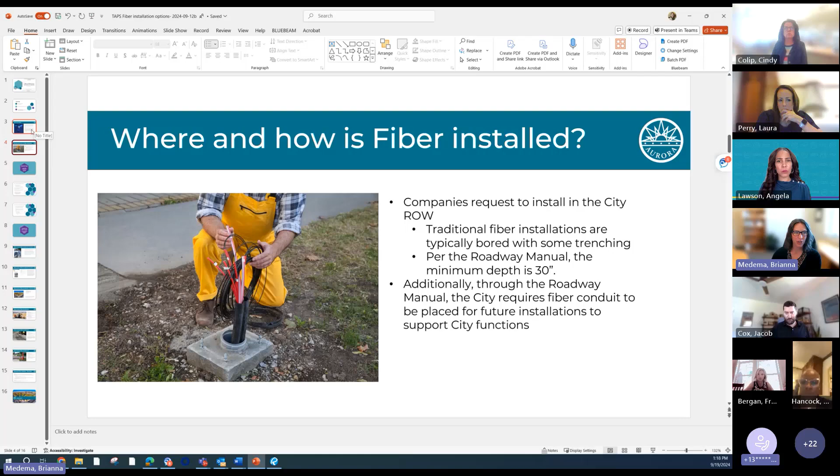Okay, great. All right, so the next one is the permitting, and we're walking through what the city has done in the last couple of years and the current process. So fiber is permitted through a master license agreement, which is one master license with a specific company. Then there are individual plan sets, which are individual engineering submittals. And then there is a public improvement permit, which is the permit to do the work in the right of way. So there's a couple different steps on that.

Fiber applications are required to adhere to the city's code and criteria. One thing to note is that all fiber companies must be treated fairly and equally, so what we do for one company must be allowed for all companies.

Last year, the city processed 131 fiber folders, which are individual engineering documents for fiber installation. This year to date, we've processed 121, split into two groups because we've had a significant process upgrade this year with a fiber portal. Before the upgrade we had 86, and we've processed 35 within the new portal.

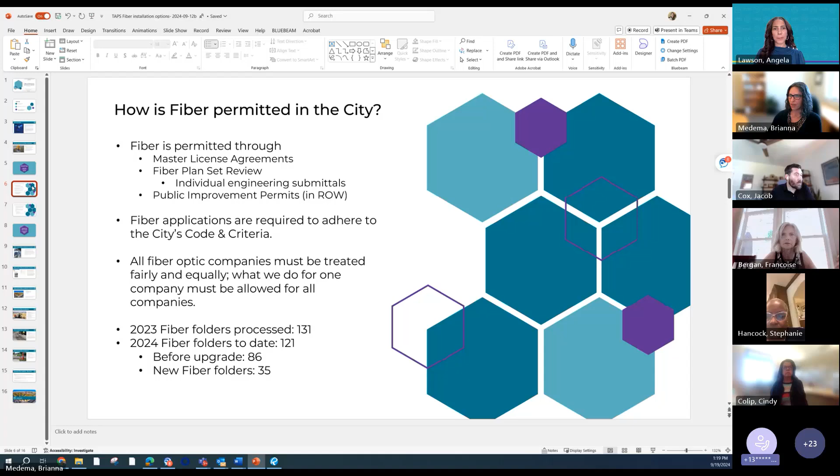So the city has fiber standard operating procedures. These were first created and implemented in 2022, which included significant industry outreach to make sure we had a document that would help new providers come to the city and get through our process easier. It's a document that summarizes both the process and the relevant criteria. This fiber SOP was updated both in 2023 and this year, based on cities' and applicants' feedback, and updating Aurora water standards and criteria.

Previously, there were things that were emailed back and forth. Now we have a little bit more accountability since we're in that portal, more traceability. With that new portal, we have an improved process, and we're using and leveraging some of the technology we have to make these reviews more efficient and faster.

So those are the things that we have done for the permitting and the improvements. One of the bigger things we've had in the last couple of years is a request and an evaluation of new installation technologies.

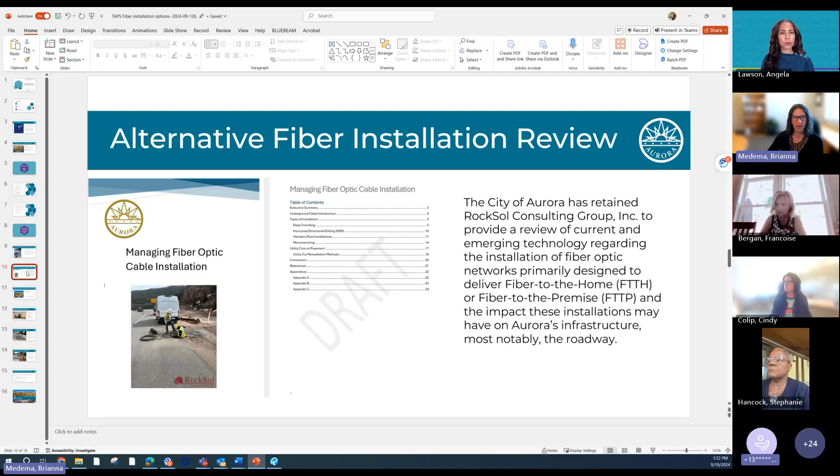The new technologies are within the roadway and how that could impact it. The different options that were looked at and evaluated were trenching, directional bore or horizontal directional drill (HDD), plow or vibratory plow, micro trench, and then missile bores.

One thing to note here is the city needs to treat all the different fiber companies equally. So if there's proprietary things, it makes it really difficult to have equal rules for all.

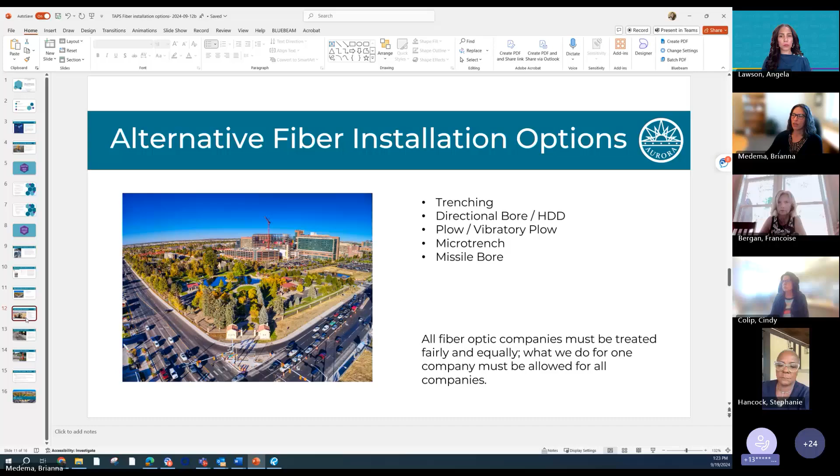Moving on to trenching, this is adopted by the city. This is essentially to dig a trench, expose the whole area, then put it in the bottom of the trench and cover it up. It's used in challenging locations where there's a lot of utility conflicts, and the depth for installation is 30 inches. So you dig that trench of a minimum of 30 inches for installation.

Directional bore or horizontal directional drill is adopted by the city. This is primarily how fiber is installed currently within the city, and the city's minimum is that 30-inch depth.

One of the things we're looking at is under consideration for the vibratory plow technology is where this would be appropriate. This is definitely not an area we would want, or not an installation technology we would want, adjacent to mature trees or infrastructure that's in place.

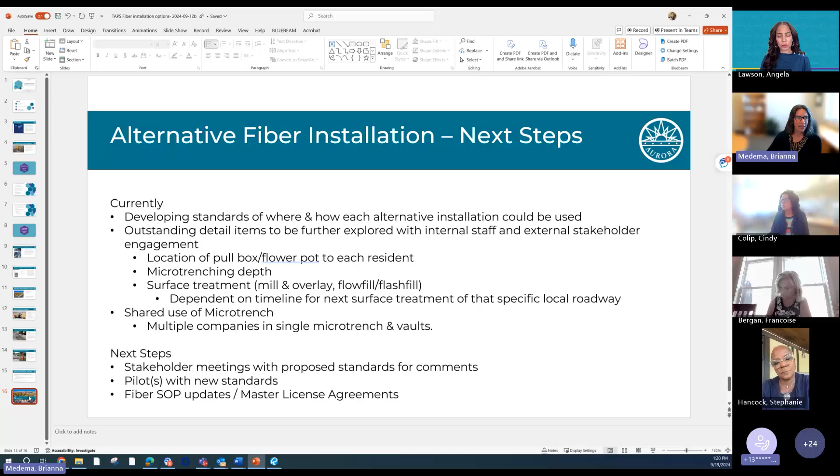Vice Chair Bergan. Oh, thank you. I don't have audio, so I'm on my phone. I didn't know if you knew that.

I have a question on the missile bore. You said it was paired with microtrenching and that it would, I think, avoid the curb and gutter. Can you explain that again? Because I didn't quite understand how that works.

Absolutely. There's a couple different terminology or different terms that are used for this. But this would essentially be a shallow bore that would go from the roadway underneath the curb and gutter and underneath the sidewalk, and then it would stay roughly at the same depth as that microtrench. Unfortunately, these missile bores don't have high accuracy of left and right and up and down, so there's some challenges for that. So that's what we have.

Okay, so just in terms of all these alternatives, which one is less invasive on residents' yards? Because I'm sure other members on this committee have probably had constituents reach out about their yards being ripped up, and equipment being put in wrong places and having to then wait months to get it back to what it was supposed to look like. I actually had a constituent that I think ended up almost in litigation over it.

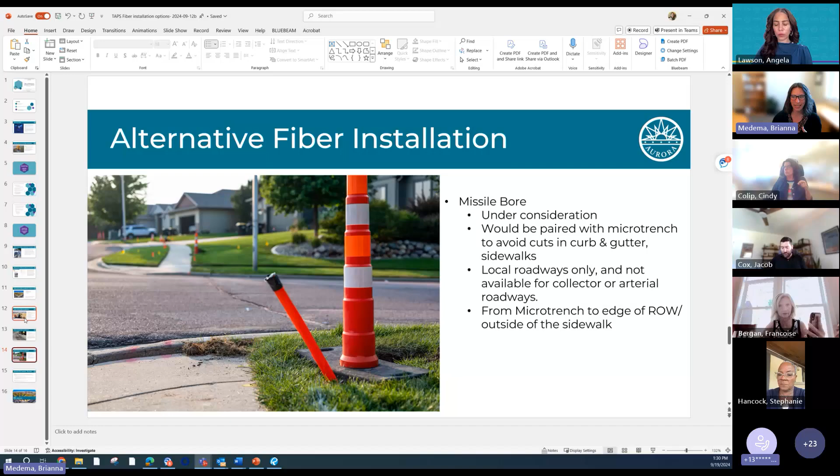The microtrench, with the primary line, would be in the roadway, but you would have individual drops to the residents from the front of the yard. So oftentimes right now, the impact is to the back of the yard and the utility easement, and that is a significant amount of construction in the back of the yard. With this example, microtrenching would be in the roadway with the bores going to flower pots. There would still be disturbance from those flower pots to wherever they're served, but it would be to that individual home, if that makes sense. Yes.

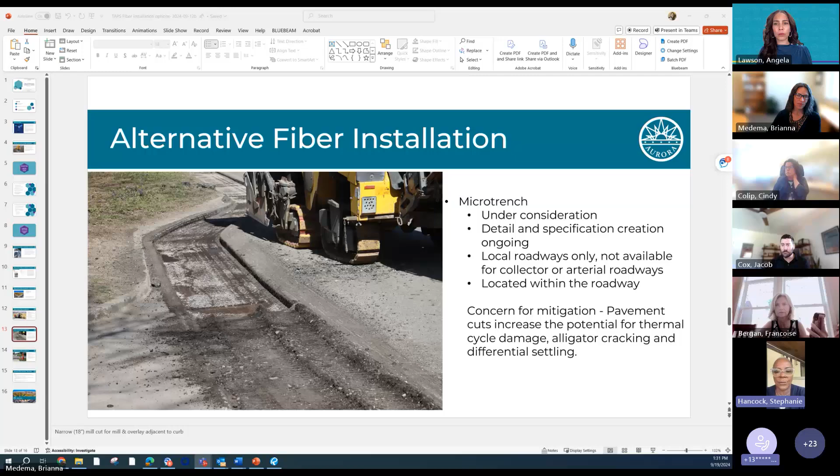I had the opportunity to see Google Fiber do the micro trenching in, I think it was Lakewood. And I was really impressed with how they went right along the seam between the gutter and the pavement and how they went down. They were doing probably, I don't know, Laura, you were there that day. They did like 1,500 feet in 30 minutes or something crazy like that and covered it. I thought it was really impressive and neat and clean the way they did that.

They did express that the micro trench went down 12 inches and it was covered by the slurry or whatever the stuff is they put on top. But the thing that they did mention is that it was a singular drop. They couldn't have a bunch of people on top of them because if there were repairs needed, then that would be an issue. So I'm trying to understand.

I don't want to force people to do things, and I want us to do things that are going to impact technology access in our communities in a positive way. And when we're looking at these other alternatives, the boring and the big trenches and the holes in the ground, to me, this micro trench seems like a smooth, clean alternative. And the fact that, as they expressed, companies like theirs are absorbing retrofitting or damage that could possibly take place.

And to your point about the fiber pots, as they went into the front of the homes, they were small boxes about 500 feet apart, depending on which customer decided to utilize their service. I think this is a really good alternative to what I have been seeing. To your point, Councilmember Bergan, the disruption in the yards of the neighborhoods that I have been seeing has been really substantial. So I'm thinking that we should seriously take a hard look at this micro trenching as an alternative that the city should consider.

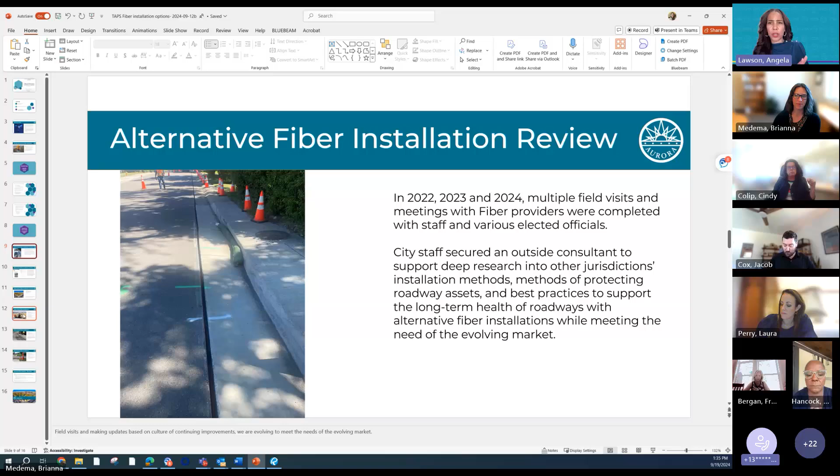So my question to you is, I'm trying to connect the dots here. I know we're talking about micro trenching, but for Quantum Fiber, what's happening with that? They're doing work already in the southeast area, especially in my ward. So if we're looking for alternatives and we're talking to all of the providers, tell me how that is connected to what we're talking about here and how that will impact the residents even more if Quantum Fiber is already digging.

I don't believe Quantum Fiber is doing micro trenching. Is that correct, Laura? No, but what I'm just asking, Chair, is that they're putting in fiber. So I'm just trying to understand how much more impact this will be if they're already doing that in that neighborhood versus the micro trenching. What will be the significant impact, because they're getting fiber done and then we're doing this micro trenching, which could impact the areas more. So if I'm addressing the question correctly, sorry.

No. I understand because I've had complaints as well with Quantum Fiber accessing people's backyards, and they're very upset about it. I think what they're doing is a little bit different than what Google Fiber is proposing. Laura, can you speak to that? Yeah, I just want to know, what would be the other impact? They're digging up people's yards, but if people are impacted by the Quantum Fiber stuff, what is the real impact to these residents as council members? We have to prepare for that.

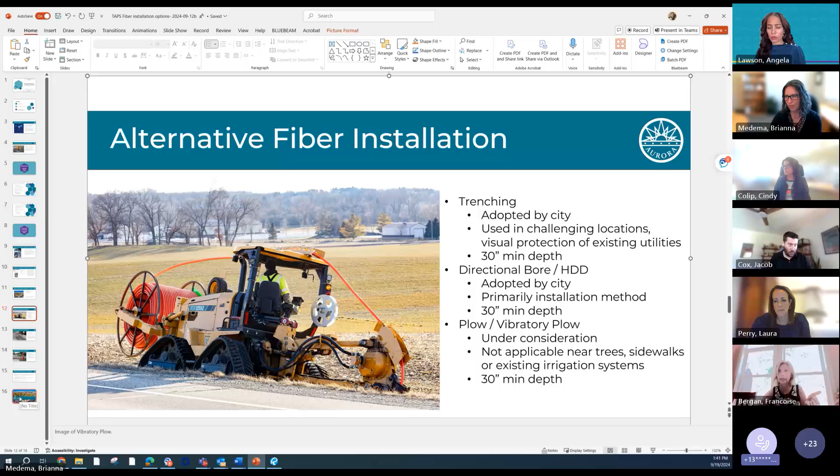I had another customer, they were not happy with the amount of time it took for the contractor to even really talk to them about putting the landscape back the way it was. And then when they finally, months and months later, did the work, it was not to their satisfaction. And my constituent was told, well, you're going to have to sue them.

Number one, we would go after the contractor. If the contractor didn't fix it, then we would go after the actual company. In this instance, Quantum is actually Lumen, which was CenturyLink. It was Lumen, yeah. Right. Okay, so in our agreement, do you define that the landscaping must be put back to the original within X time frame? I don't have a time frame in there, no. Can you add it?

I don't know if I would have to take it to legal, to be real frank with you. Okay, because, Councilman Bergan, if they don't fix it for 6 months and you end up in winter, and then they can't have it fixed till spring, I mean, you could be looking at 9 months. Yeah, Councilman Bergan, you're raising a very fair point. Let us go back and take a look at that and see opportunities to add some teeth in there.

Yes, definitely HOAs. We've run across the issue, and working with you, let's see what we can do to make sure that we can ensure that that time frame is added in there. I would escalate that with legal. I think they would be okay with that. Thank you, Chris. I think the contractor Lumen and them would be okay with us having a little bit better restriction.

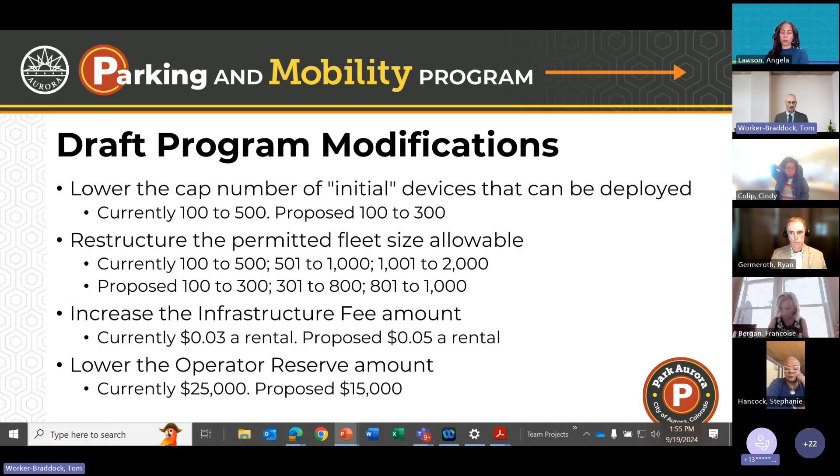And then we would lower the operator reserve amount that I mentioned. Right now it's $25,000. We would reduce that to $15,000. And we feel like that would still provide sufficient capital. Should an operator suddenly leave the city, we can still go and collect those devices.

And so that's my presentation. With that, I'll ask, does the committee support moving forward this program update to the next available study session for informational purposes? I'm also available to answer any questions you may have.

Councilmember Bergan? Thank you. Yeah. I guess it seems like this program is not working for Aurora because, I don't know why it's echoing, but the fact that we're not urban like Denver, very concentrated with a lot of businesses where people would utilize these. Is that really what it came down to? Because I know you said you're reducing the fees for the reserve and the rental amount and so forth, but it just seems like it's actually a program that's not conducive to a city like ours with 164 square miles of land and not really a concentrated area. Or are you looking at specific areas of town?

Well, the only areas of town that we would require operators to be in is within 2 miles of any light rail station. And that's really so these devices are available for people to use to get to transit. If the mobility operator wants to deploy in other parts of town, they can. But from what we've seen, when, for instance, Bird came in, they really focused on the areas of town generally around central Aurora and northwest Aurora. Didn't really see them deploy out into the other areas.

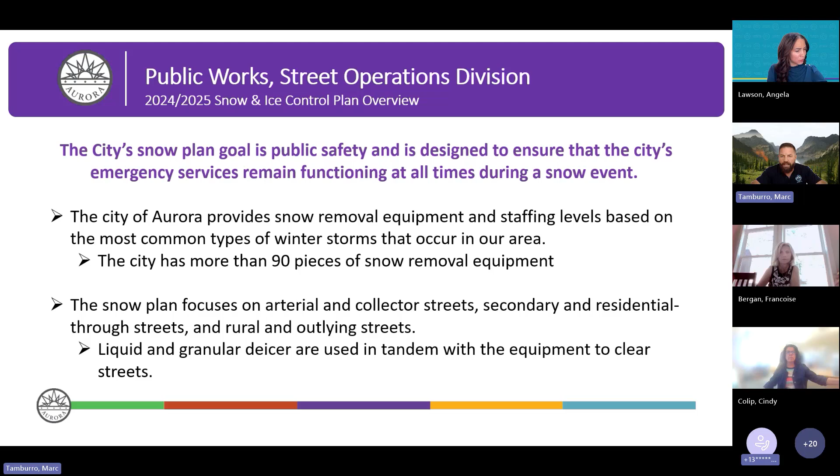So our plan focuses on arterial and collector streets, and then secondary and residential through streets, and then of course our rural and outlying streets. We do use different materials to fight snow throughout the winter. We have liquid and granular de-icer and anti-icing materials, and we use them in tandem with our equipment to clear the streets.

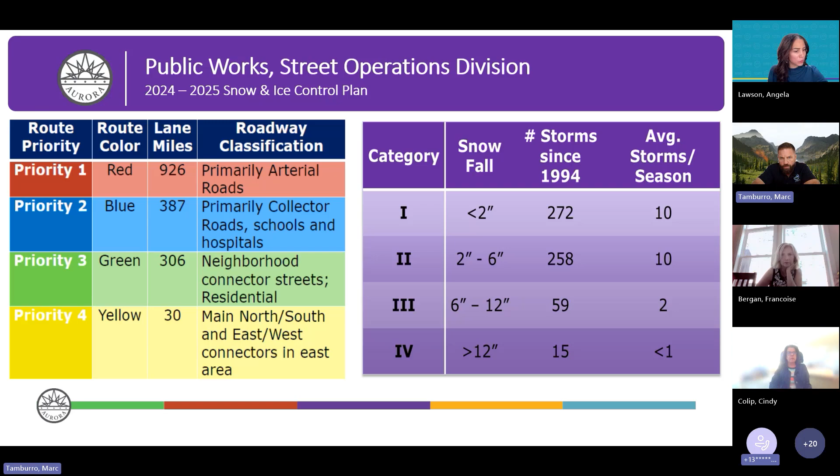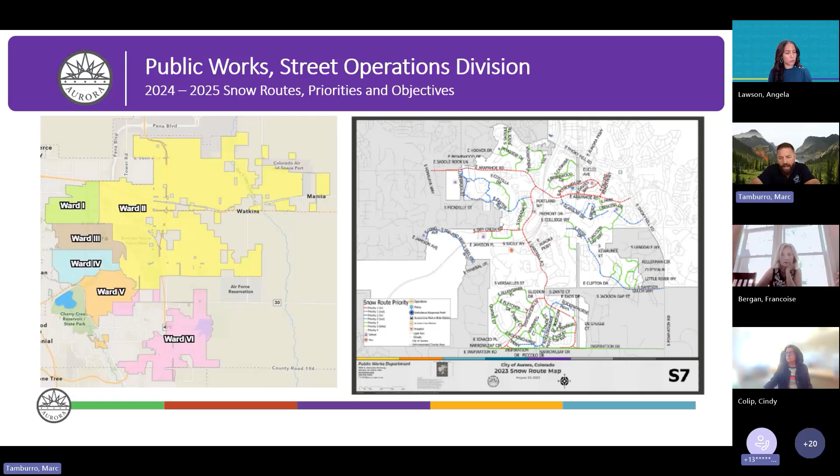We can't put deicer down too early, and it's temperature dependent. It also depends on snow falling on top of that material relatively quickly, because that material can actually be slick when applied to pavement if we don't get snow shortly thereafter. It's primarily to prevent snow from building up on the asphalt, so when we plow, we can get it down to the asphalt surface and prevent buildup.

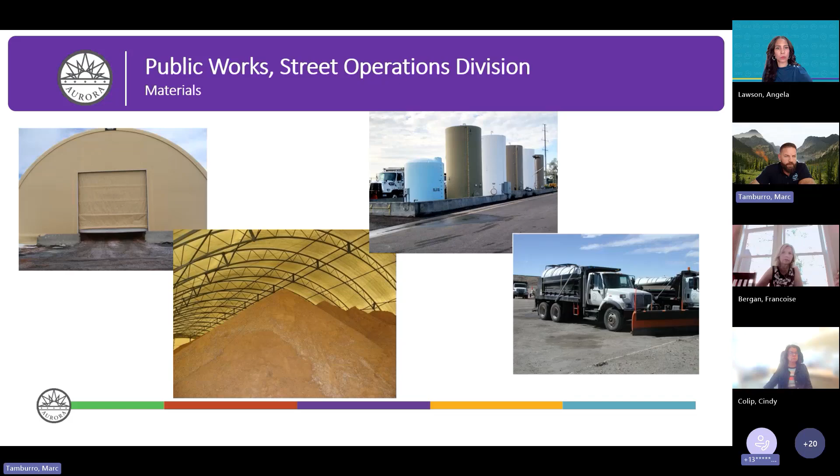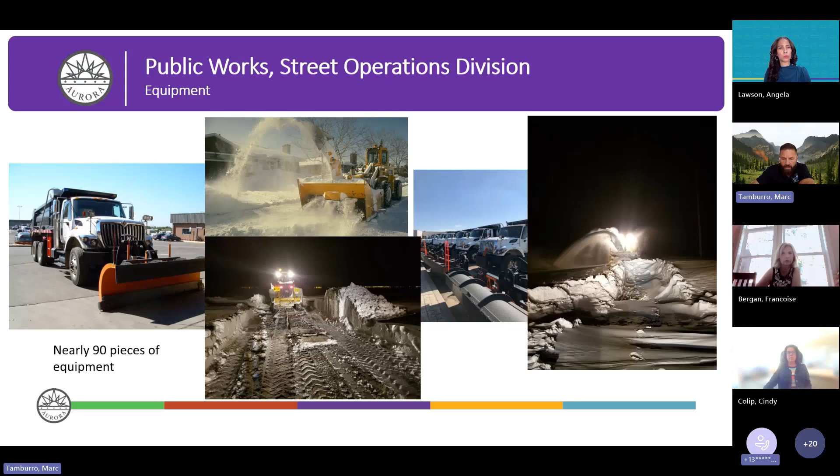Just another look at our equipment. Typical tandem axle plow truck on the left. Snow blower loader attachments are super helpful, especially out northeast where there's a lot of blowing and drifting due to the lack of development.

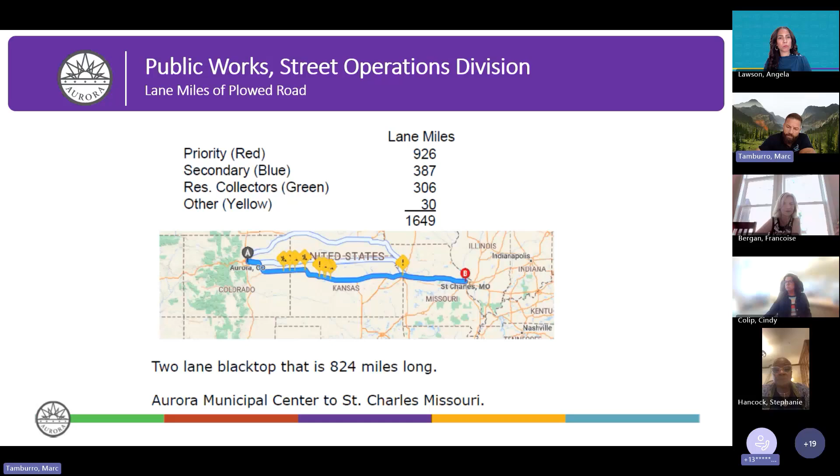And of course, towards the center, we have quite a number of tandem axle plows. This slide gives you a good indication of the amount of lane miles we have to plow. You can see the breakdown of the red, blue, green, and yellow. It's the equivalent of driving out to St. Charles, Missouri and back, on a 2-lane blacktop. So it's quite a bit that we have to maintain during these events.

This slide gives a shout out to our sister departments, Aurora Water and Parks, Recreation, and Open Space. They provide staff and equipment, and we really can't do this job without them.

We just wrapped up the annual snow rodeo where everyone comes out for training and showcases their talents. We have people we're sending to regionals up in Loveland next week. It was a very good event, with a good spirit of cooperation and a good networking opportunity for folks to meet one another and get familiar with what we're doing for this upcoming snow season.

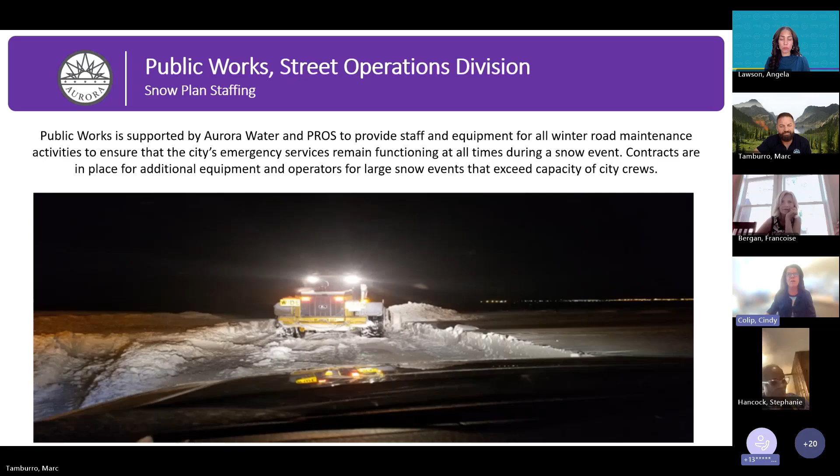Can I just add that it was really exciting because Public Works was actually top 3 on the tandem driving? We have 3 different teams going up to Loveland, and 2 of them include women. So it's pretty exciting - we have a lot of good women out there working alongside our men. It's a pretty neat opportunity for them. Agreed, yeah, it was a great event.

This slide highlights sidewalk snow removal, which comes up each year. It's important to note that our staffing levels continue to be limited for primary snow responsibility, and we rely on internal resources like Parks and Aurora Water. Honestly, for a category 2 event or larger is when we're calling those other departments in. In Public Works streets, we can staff a category 1 storm by ourselves; beyond that, we have to call in our sister departments.

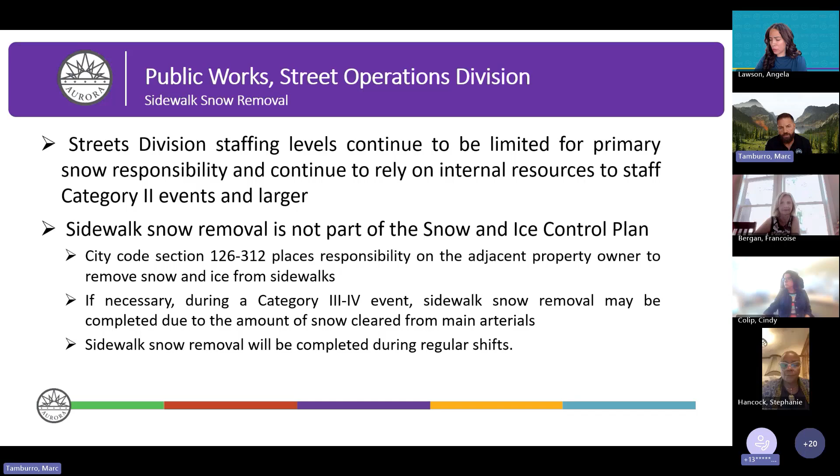Sidewalk snow removal is not part of our snow and ice control plan. City code 126-312 places that responsibility on the adjacent property owner to remove snow and ice from their sidewalks. That said, during a category 3 or 4 event, we may inadvertently place snow from the roadway onto the sidewalk because there's simply no place to put it. When that happens, we go out and remove snow from the arterial sidewalks only, during regular shifts - not on overtime, in order to maintain fiscal responsibility with our snow budget.

Another service we provide throughout the winter is ice cutting. Very few municipalities offer this service - it's very hard on the equipment and can damage some of our assets. We have some really good operators, as Cindy mentioned with the snow rodeo, both women and men, who can remove the snow and ice without damaging our assets. So it's a pretty big deal.

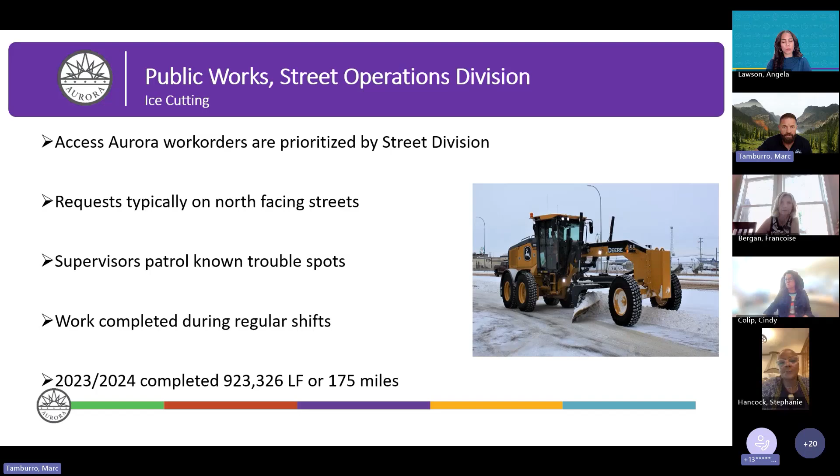Requests come in through Access Aurora. These are typically north-facing streets. Our supervisors are constantly patrolling the areas, creating lists on their own so they can dispatch equipment and personnel out to those areas. It's completed during regular shifts because it's not our primary function associated with the snow and ice control plan. In 23-24, we completed 923,326 linear feet, equating to 175 miles of ice cutting, which is quite a bit.

So with that, I got to thinking about all these ice complaints that roll in and decided to work with our GIS team to create a tracking map.

And that'll just help us to further define where our trouble spot areas are. In the instance of having to hire a contractor, this will be extremely valuable for us because we can really paint a picture of where the contractors need to go to really benefit the citizens the most and provide the highest quality service level, as far as removing snow and ice.

No two storms are the same. I think we all know that. We live in Colorado. You know, if you don't like the weather, just wait 5 minutes, right?

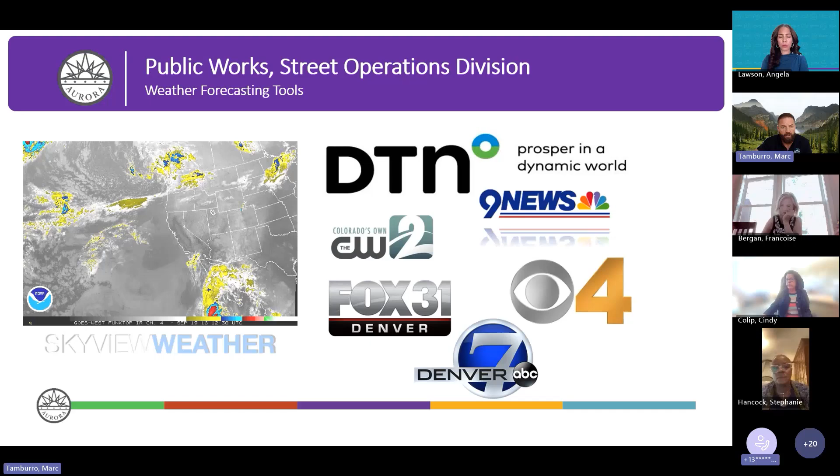Everyone always likes the Farmer's Almanac, so they're talking cold average snowfall for us this year. And NOAA is talking about a La Nina pattern expected to dominate. The South's going to see warmer, drier conditions, and the North tends to be wetter and colder.

That being said, we do live in a high desert in Colorado. A lot of our storms can be dry, but when the spring storms come, as everyone knows, they have a tremendous amount of water content to them.

So again, no two storms are the same, and we really have to make on-the-fly adjustments during our storms, depending upon how the storm originates, north versus south, the winds, the air temperature and the surface temperature of the roadway and the bridge. It all plays into our staffing levels, both north and south side of town. North or south staffing levels can be different, depending on the storm.

And with that, I'm happy to answer any questions.

Does the policy committee support the 24-25 snow and ice control plan informational presentation moving forward to the next available study session?

I see Councilmember Bergan, you have your hand up. Go ahead, Councilmember Bergan. Thank you. Who's echoing? Is it me? There's a pretty bad echo.